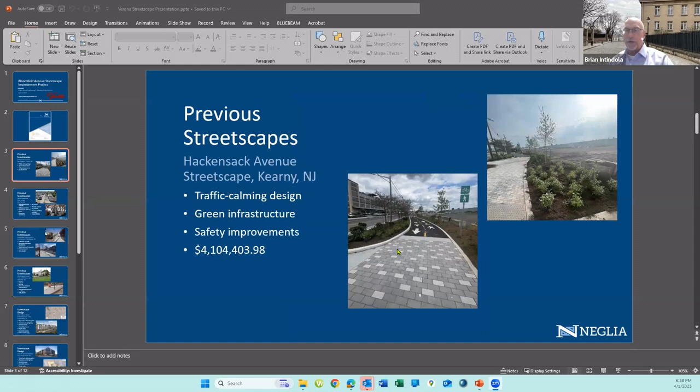So we're here for the RFP that we submitted back in September, and that was the cover page for it. We've been invited to talk about our experience, so I'll get right into it. Our office has done three or six streetscapes of this scale, like Hackensack Avenue in Kearny, which was a quasi-federal project with a federal inspection process. We qualified to be federal inspectors on that project and saw it through, and that came out beautifully.

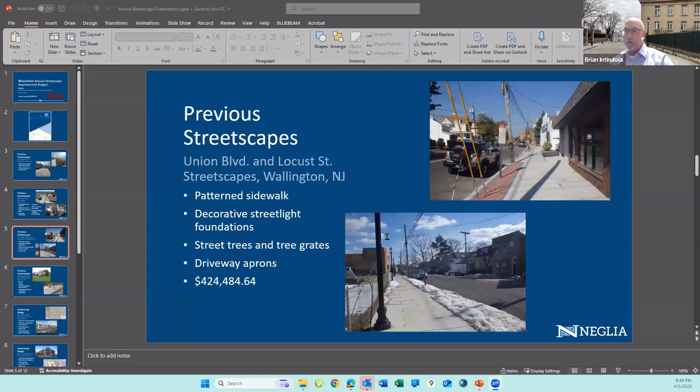Dave, who's on this call with us, did the Abbot Boulevard streetscape in Fort Lee. That was an interesting one, they're all interesting streetscapes, because that had protruding basements into the right of way, so we had to rebuild roof sections in several locations. We worked through that, and then we also did Wallington recently.

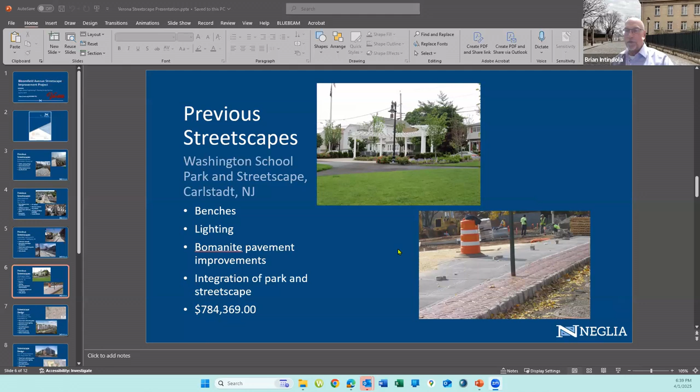These are pretty straightforward for us, but not for the people on this call, because you're vested with coming up with a vocabulary of appearance for this run on Bloomfield Ave. It's an important run because it has a couple of characteristics: the park on the left-hand side as you come up from Montclair, a major left turn where people go onto Pleasant Valley Way, and then your town hall. So it has like micro-neighborhoods, each with its own mini character, in the stretch that we're going to be entrusted with.

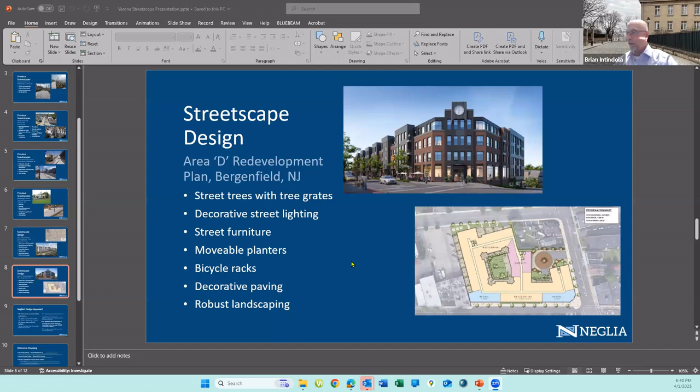And this is what we laid out for Bergenfield, which Dave and our planning group worked through. So what I'm going to do is just tell you what our design approach is to a streetscape.

We listen to the aesthetic of the stakeholders. The people on this call, and you might have a subcommittee, have a pretty good idea of what they want to see. Then we take your vision and apply our experience and design acumen to bring it to fruition. We know some things cannot happen, but some things may happen if we're creative and work through the permit process, whatever it may be. And we can't promise pie in the sky.

Behind me is a French street scene behind Sacré-Cœur. It'd be nice to build that, but this is not Paris. This is Verona. Bloomfield Ave is a hard-working road that provides access.

Sometimes when 280 backs up, it takes that same type of traffic, and we're mindful of that because the three of us grew up in the area. Dave grew up in Clifton, I grew up in Nutley, and Anthony's from Saddle Brook. So we understand what we're doing here.

And when we go to design and it goes to bid, whoever the design principal is going to be—Anthony, Dave, or myself—we respond immediately once we go into construction, because we can't wait around, the contractor can't wait around, and blocked sidewalks can't wait around for the design engineer to say we'll get back to you, we don't have an answer. In Neglia world, that is not acceptable, and that's how we operate.

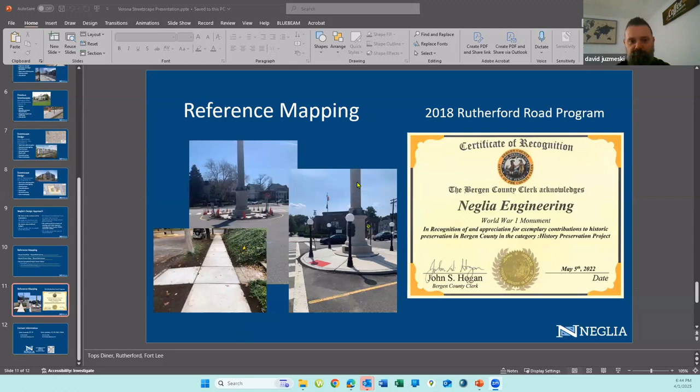We have a lot of communication with them, and we use our experience to promote the project as a whole. You saw some concepts and plans we've done in the past. One of the more challenging ones was the one we completed in Fort Lee recently, as Brian said, where the retail uses of that streetscape had basements under the sidewalks and within the right of way, and they were aged.

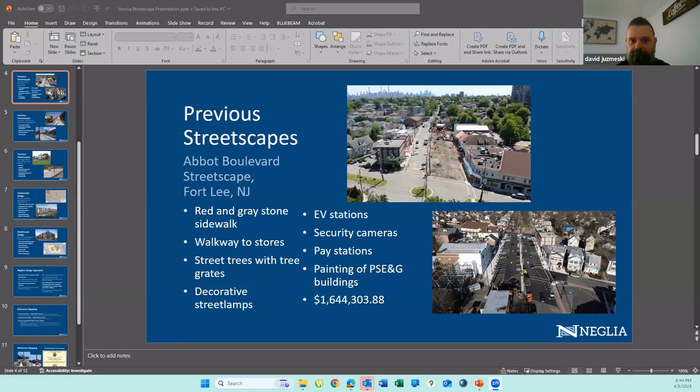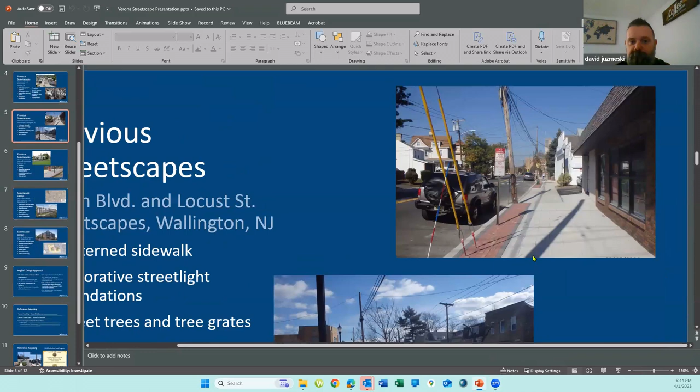The shop owners and retail owners didn't even know their basements extended into the right of way. So we had to come up with ideas, structurally, to mitigate those conditions and make sure the roofs could take the capacity of the new vehicles that would be on the project.

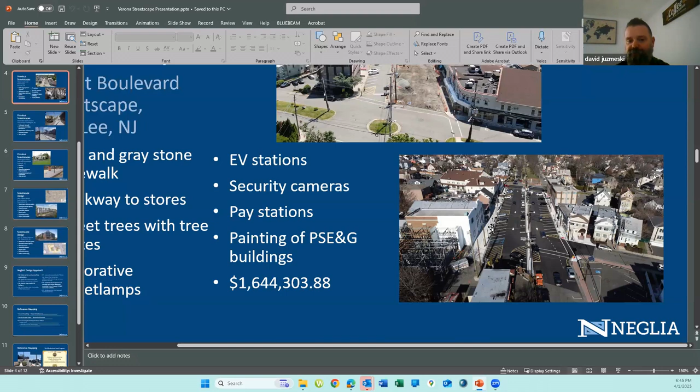That project as a whole incorporated several elements. We had street trees, decorative street lighting, EV stations, security cameras with fiber optics, make-ready EV stations, and a mixture of materials—pavers, concrete, asphalt—everything you can see in a streetscape.

So I think our experience would really help any streetscape project, just because we know and we've been through the trials and tribulations of these types of projects, and we welcome the challenge that Bloomfield Ave will bring to our team.

Brian, that's all I have. I don't know if we take questions now or...

We appreciate that for most people living in Verona, Montclair, and the Caldwells, Bloomfield Ave is their lifeline. So we have to balance throughput for rush hour and also create an aesthetic that comes from you, and put that together. Dave, Anthony, and I all have ideas of what to look for. When I drive down this section of Bloomfield Ave, it's like an amphitheater when you come down from Route 23 or Pompton Ave, and then it goes down and bellies out, so you can really create a nice platform for landscaping.

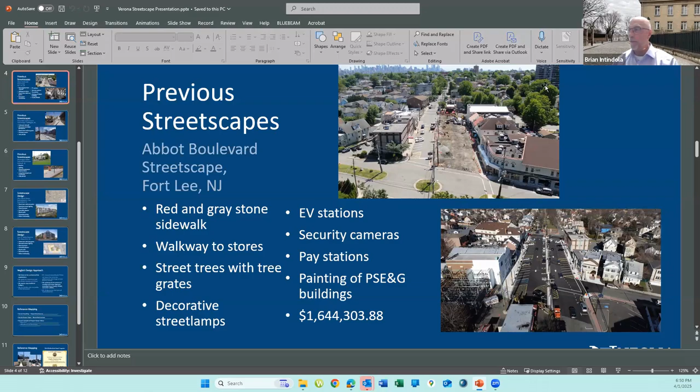So that's really where we're at. If you guys have any questions for us, I'll stop sharing my screen for now, and we can take it from there.

Sure. We're going to go through this council member by council member. If we have any questions, I'll start.

Do you have any specific recommendations for Verona? I know a lot of the other two presentations we're going to hear this evening, based on what they submitted to us, put some tentative recommendations out there as things we should be looking at, different options for various parts of the project. I didn't see a lot of that in your presentation. So if you have any specific items as far as what analysis you've done of the issue in Verona, and any recommendations you'd have to address, even on a macro level, those issues you've identified through your research into this specific project, that would be helpful for the council to hear.

Right, so we believe we should not make that presumption of setting the table for an aesthetic.

We believe we need to listen first, and you drive the aesthetic. In larger terms, I don't believe you have a 4-lane cross section on Bloomfield Ave for the streetscape. I don't see a dramatic change in that because you need the throughput, but you can also enhance the aesthetics by using street tree species that are salt hardy, and there's any number of species.

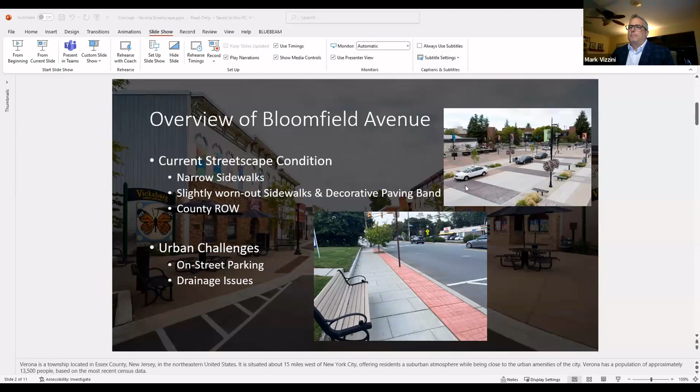Again, I was just speaking of some of the existing conditions of the downtown and the streetscape that you have. You have some nice lighting, a decorative pavement band that looks nice, that traditional flag scored running bond paver, scored sidewalk.

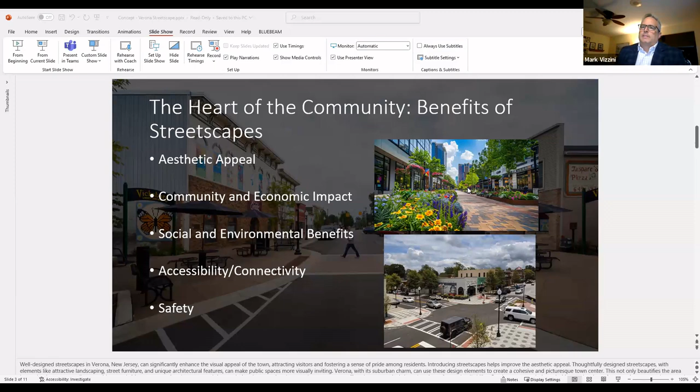Obviously there are benefits to enhancing the streetscape, which I just talked about: aesthetic appeal, community and economic impact, social and environmental benefits, accessibility and connectivity, and then of course safety.

Some of the essential components, again, we talked about accessibility. We want to design sidewalks that are good for everyone, whether you're impaired or not: clear visibility, no trip hazards, ADA compliant.

Sustainability: we have a very narrow sidewalk, so to the extent we can, we'll add some planting, bump outs or bioswales, tree pits, light colored pavements to reduce urban heat island effect. I see it in the streetscape that we're doing. The sustainability portion is a minor one in this, but we can add small elements to the streetscape.

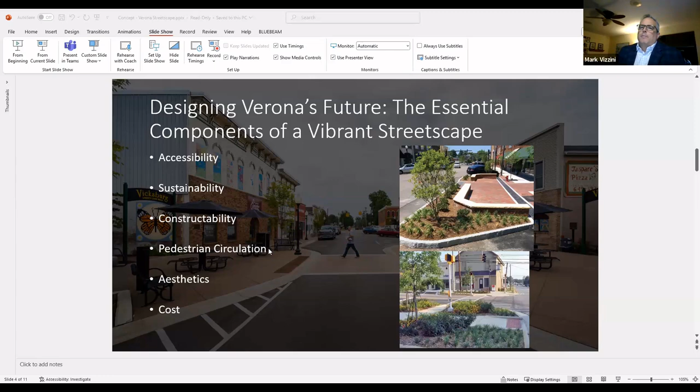Constructability is definitely key. Clear pedestrian circulation, there's different means in which we can provide aesthetic benefits, and then of course costs.

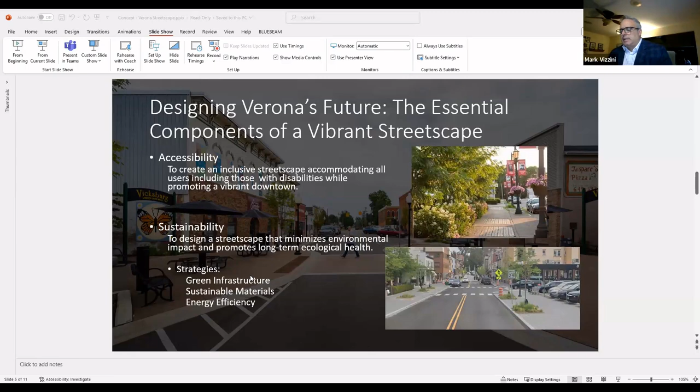Again, accessibility: we want to make sure that our streets are inclusive and they can accommodate all users with disabilities or not, while promoting a vibrant downtown. We can try and incorporate some green infrastructure, sustainable materials, energy efficiency if we do new lighting with LED lighting.

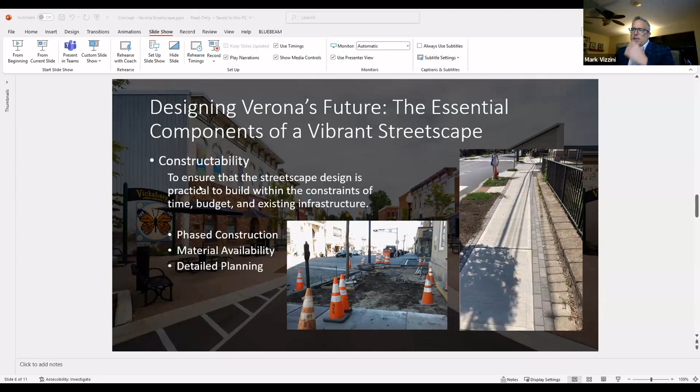Constructability: we want to make sure it's practical to build within the constraints of the time, the budget, and existing infrastructure. We want to phase the construction, make sure we're speccing material that's readily available, and plan accordingly with the town, the DPW, even so far as any special things with existing businesses to try and limit interruption during construction.

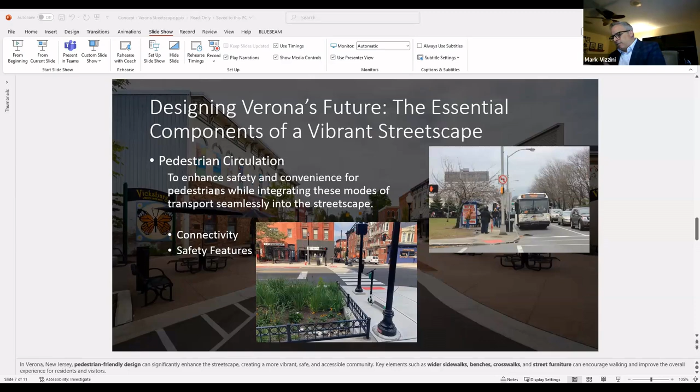For pedestrian circulation, we want to enhance safety and convenience, provide connectivity, safety features, the truncated dome, clear lines of sight, less interruptions, keep stuff out of the walking zone of sidewalks, less trip hazards.

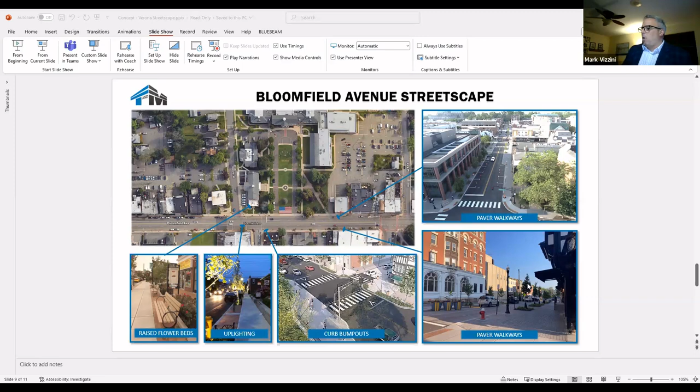Walkways, we think that's where you're going to get your biggest bang for your buck if we wanted to provide a real punch. I know right now we have a concrete sidewalk and a paver band. We could look to do the whole sidewalk as a color, to make a bigger statement instead of your narrow band. This example in the corner just provides a bigger punch of color. That's typically where you get it with a narrow sidewalk where you can't always get trees in, and you do want to make that statement. You can do that with pavement, whether it's stamped and colored concrete or brick pavers. It's a balancing act between cost and maintenance, and it's something we'll work with you guys to establish, and we'll help guide you there once we get your input.

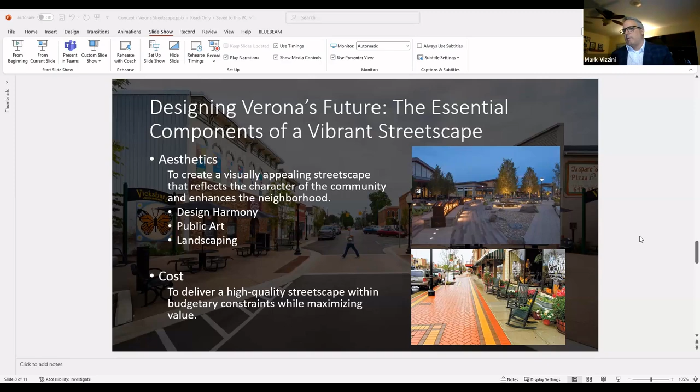I think originally they wanted to have a design concept, but there's also a public participation aspect to this. So rather than be presumptuous, we really want to work with you and key stakeholders to get some input as to what you'd like to see. Then we use our professional experience and engineering to come back to you and say, here's how we can incorporate some of these ideas. We can never incorporate all of them, but we at least got your input and feedback, and then we'll present the design alternatives back to you. You'll have an opportunity to weigh in and say, yeah, I like this, or no, I don't want this, or I really need this in here, not that. So we really want to work with you all to develop what those key programming items are. I know site furniture and lighting were mentioned—those are some simple things, but if more specific items come up during that process, we can try to incorporate that into the design.

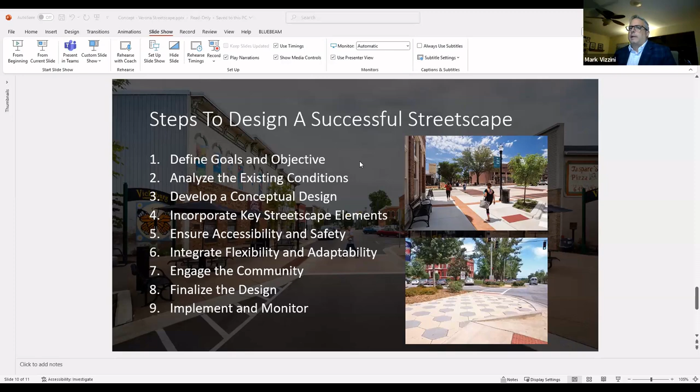We'll integrate flexibility—the key thing to a streetscape is when you make everything fixed, the second you need to change something it becomes impractical. So where you can incorporate flexibility and adaptability, if you have some bigger spaces, like right in front of the town hall, design it so it can meet a multitude of things. It's not just designed for one activity or one use—you get multiple uses out of it. We want to engage the community, present the final design, and then the key is to implement it and monitor it as it's being constructed to make sure it meets rigorous standards, so the contractor builds a good quality product at the end of the day.

That is our presentation. We're excited and want to thank you for taking the time to listen to us and give us this opportunity.

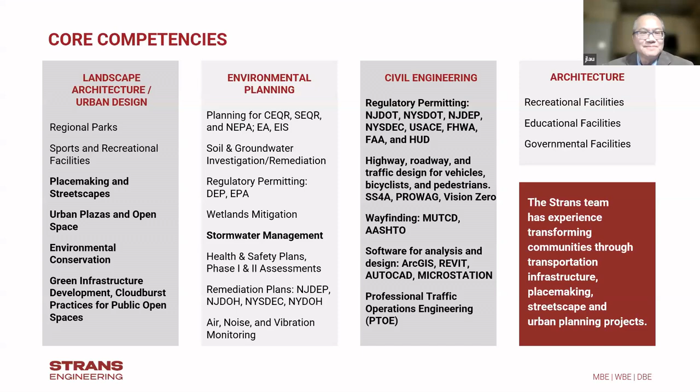I just want to introduce you to some of our leadership team. My name is Jim Lau. I am the Vice President of Strans Engineering, and Director of Design for Environmental. I am a licensed landscape architect for the past 40 years, with design and construction experience, including 30 years of New York State DOT experience on transportation infrastructure projects.

I want to introduce Avodia Abraham. She has over 15 years of practical experience in design and construction. She's presently in charge of all of our design projects that went into construction, making sure they're in compliance and meet the client's needs.

We have Veronica Sittin, who is also a landscape architect with over 36 years of experience with design, construction, transportation, and infrastructure projects. She is our ADA specialist, bike pedestrian coordinator, and our cultural resource coordinator.

I'd like to introduce you to Brian Durr from Laurel Hill, who is our partner on this project. Brian: Hi everyone, good evening. My name is Brian Durr. I am from Laurel Hill. I recently joined Laurel Hill.

I have over 17 years of roadway design experience in New Jersey and various other states. My experience includes projects just like this, and also other multimodal conversions of corridors, including road diets. I had the pleasure of being selected by Engineering News Record last year as a top 20 under 40 engineer in the nation. I think I barely made it under that young bar though.

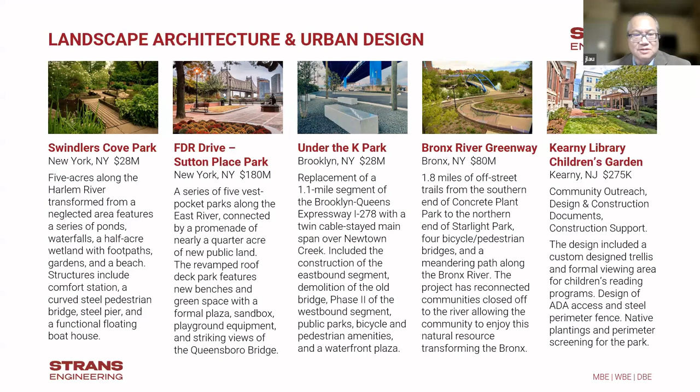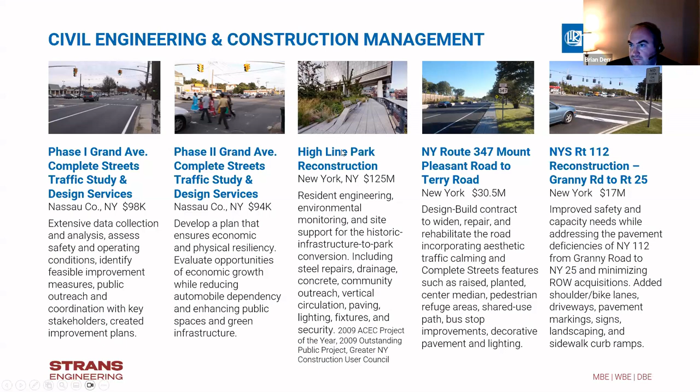Next slide. I just wanted to say that Lero Hill and Strans Engineering have multiple types of projects that we're teaming on, but I just want to bring you a general understanding of specific sites, specific knowledge.

I actually lived in Verona for probably 15 years, raising my older two kids. I'm familiar with the park system, where the police station is, the middle school. I understand that Verona is a diverse community, especially with Bloomfield Avenue having parks and recreation, basically the ball field closer to Montclair and Caldwell.

The connection points of this corridor are key in reference to the entrance into Caldwell. I understand that there's a huge commercial retail hub that you want to retain there. We understand there are some really nice restaurants, and that the schools and churches are critical to this corridor, along with Verona Park, which was designed by the Olmsted brothers. And then we have the public facilities in reference to the fire station and the courtyard.

And you have actually two side entrances into your parking spaces. Right now, they are slightly designed. I think that should be incorporated into the development of the streetscape. That's key in reference to your set back parking. Parking and on-street parking is critical in reference to Bloomfield Avenue.

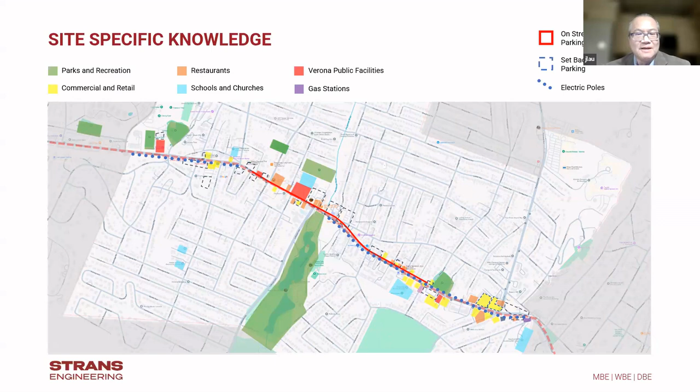We did our due diligence knowing that this is critical for the understanding of the project. I am familiar with it, but several of our team actually went out to the site and did an existing conditions evaluation of Verona. Understanding the current state of any project is key to gather that information and identify key issues to ensure that we have solutions moving forward.

Establishing a baseline in reference to the conditions of your assets. Are your sidewalks in good condition? Could they be retained? Understanding that this is going to be cost effective in the long run, only correcting measures that particularly need them. This informative decision making is going to be key in reference to the design process.

And bringing this forward to the mayor and council, your engineers and your planners, and also the community, as well as the county. We're always looking to engage our stakeholders to make sure we get their buy-in before we move forward with a particular design. And that's just cost effective in reference to assuring our design resources are efficiently spent.

Five key areas that we looked at were the curbs and crosswalks. We noticed that there were some inconsistencies there, and the street elements in reference to their conditions.

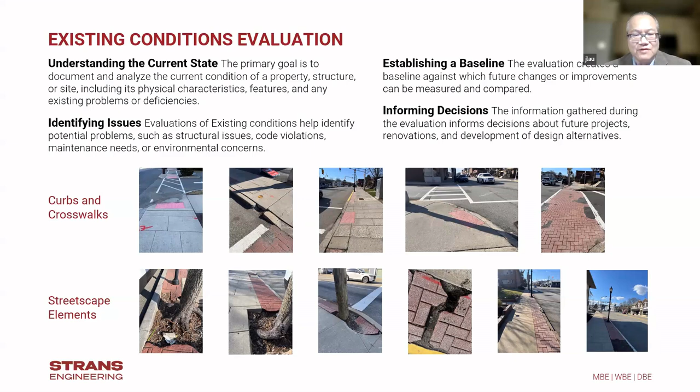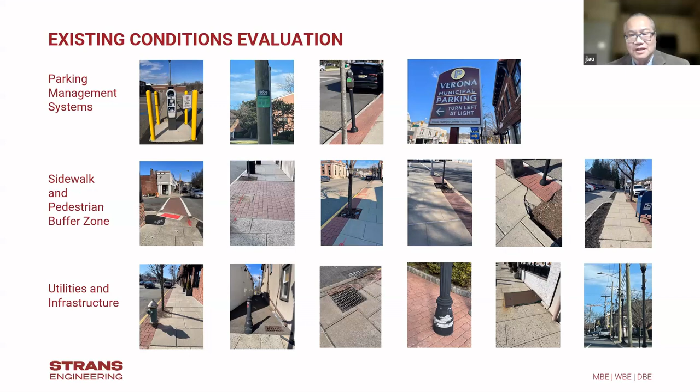I think safety is going to be the key issue in reference to restoring that corridor, along with utilities and infrastructure. A lot of utilities run throughout the avenue - fire hydrants, drainage, electrical junction boxes, lighting, even cellars. We noticed a couple of cellar entrances that are still viable. Whether they're still being used, can they be closed off? Can we talk to the actual owners of those? And of course, the electrical poles.

Our design approach: downtown redevelopment requires coordination of complex infrastructure and pedestrian-friendly elements. That's key in reference to enhancing commercial and residential development. We want the main streets to be viable - we don't want vacancies in our commercial districts. We want them all thriving within the community, which increases quality of life.

Both Strans Engineering and Lero Engineering are context-sensitive designers. As you can see with all of our projects, they are award-winning, and we want to bring that to Verona. Context-sensitive design looks at the existing conditions of the community, whether you have a brick facade or a concrete facade - these are elements of architecture, design, and landscape architecture. Besides being a true engineering firm, we have design aesthetics we want to bring forward. We'll make sure we discuss it with all.

Key aspects are vision zero, placemaking. We want to make this a destination point, beautification, and safe streets for all. There's a federal infrastructure grant that hopefully we can help Verona apply for, for any additional phases of the streetscapes.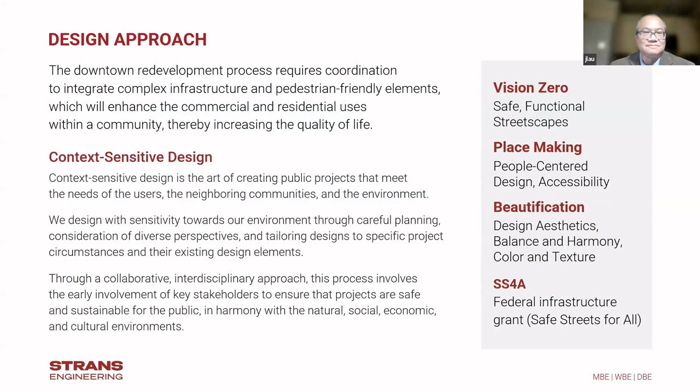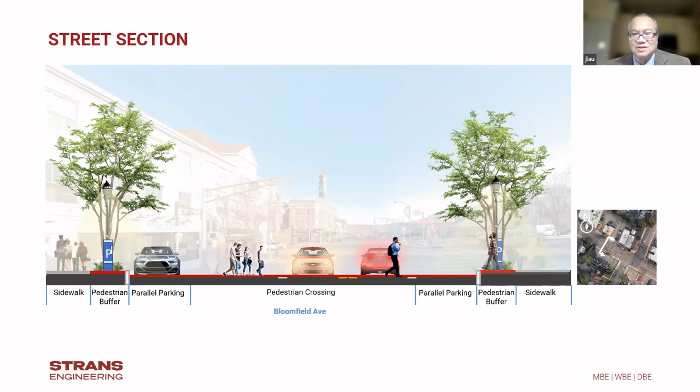We actually went and spent some time doing renderings just to show you our capabilities. We can develop street sections using existing photographs, showing aspects of street sections. Street elevations again, just showing our capabilities, conveying this to the mayor and council, to your engineers, and also the community and the county.

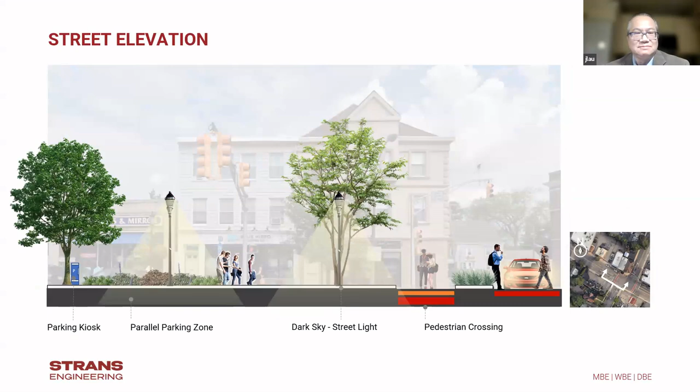We have 3D rendering capabilities. This shows some of the crosswalk intersections, looking at consistency in reference to your crosswalks, your MUTCD signs, AASHTO standards, making sure all of your ADA standards are in place, along with PROWAG for federal standards. For your lighting, dark skies, make sure we don't have any splash into residential areas, because you do have residents within some of your structures.

We can also do plan view renderings. We looked at where you have yellow lines, where you can't park due to corner intersections. Again, we'd look at the sight lines to make sure there's no disturbance. But these areas could be used for general use, such as bicycle parking, stormwater capture, rain gardens. We feel resiliency is key to any new infrastructure in this corridor. As you develop and put funding into resources, you want to look at multifaceted solutions, not just beautification, but looking at all the possibilities for betterment of the community.

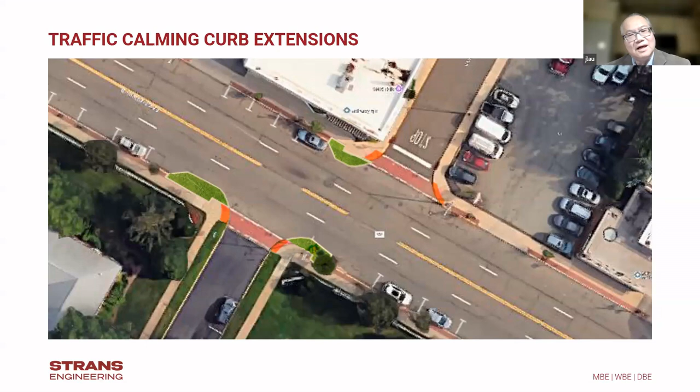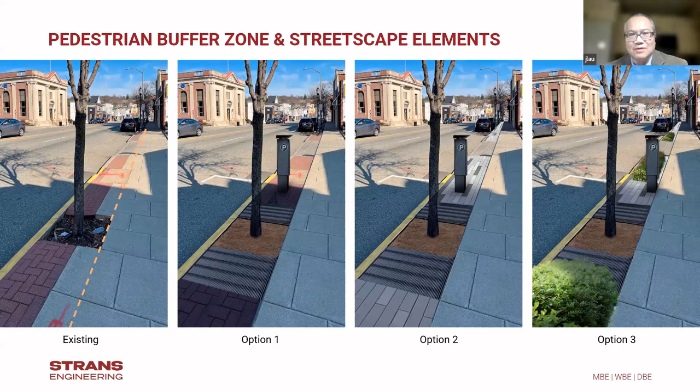We looked at the inconsistencies of the sidewalk, and visually when you have fading, one line - as in any basic design, you can see that having continuity between your streetscape is key. Just moving that one line over isn't going to change anything functionally, but visually it makes it better. These are just several options we looked at - not solutions we want to bring forward, but just showing our capabilities.

We looked at the existing pavement, the surrounding areas where it might be brick or concrete.

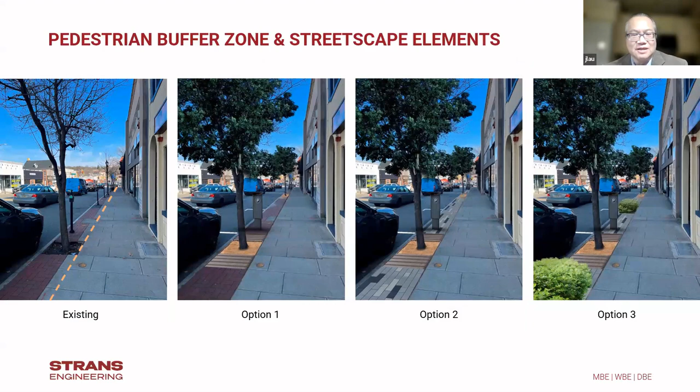You'll notice that you have a lot of meters. By removing the meters, it just declutters things. Looking at the vocabulary, color, and texture of your streetscape is going to be critical. Adding trees and green infrastructure as well for stormwater capture.

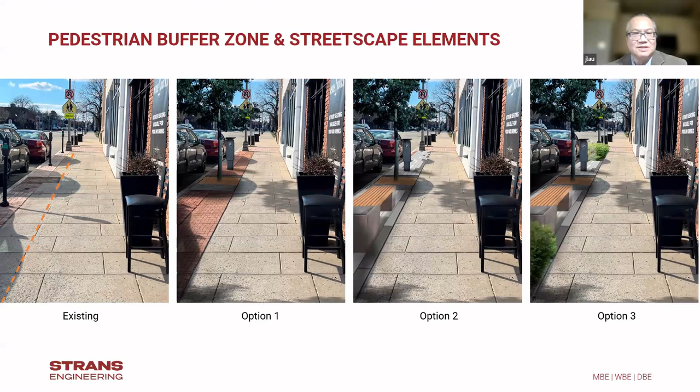As you can see here, your concrete pavement is in very good condition. Some of our design vocabulary - we feel linear pavements or permeable pavers are key in reference to flexibility. If you did have utility removals and such, you can remove the pavers and replace them. We always look to have an inventory within the DPW to assure that when we do purchase, any kind of residual materials is available.

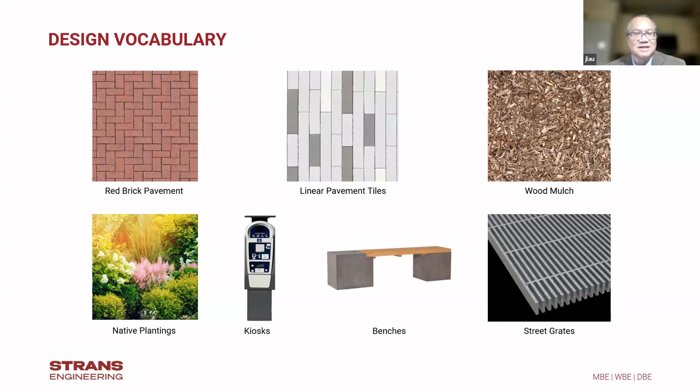Quality control and quality assurance is critical for the success of any firm in any project. We understand that this is developing the scope, understanding the design process, the schedule and goals, and our deliverables, and conveying that to you up front so we meet your schedules and your budget. Quality control plans ensure the success of built-in checks and balances so that everybody's accountable. We have quality management teams that are knowledgeable, and we set milestones for all of our staff.

Stakeholders - we make sure there's public engagement in reference to your town and community. We are landscape architects, so we are great communicators, both visually and verbally. We'll make sure we have buy-in from all the aspects, and this is key to any environmental or planning process. If it's not accepted, it won't be successful in the long run. Communication and documentation is critical to the success of the project. I think everybody knows that.

The Strans advantage, along with our Laurel Hill teammates - we're solution-based thinkers. We want to have a solution, we don't want to say no to something. There's always some kind of alternative that is a betterment. If you ask us a question, we're going to think about it and come up with a solution. We're going to be open to having that with all of our teammates, knowing that their outlook might be slightly different. So we're always looking for a fresh outlook.